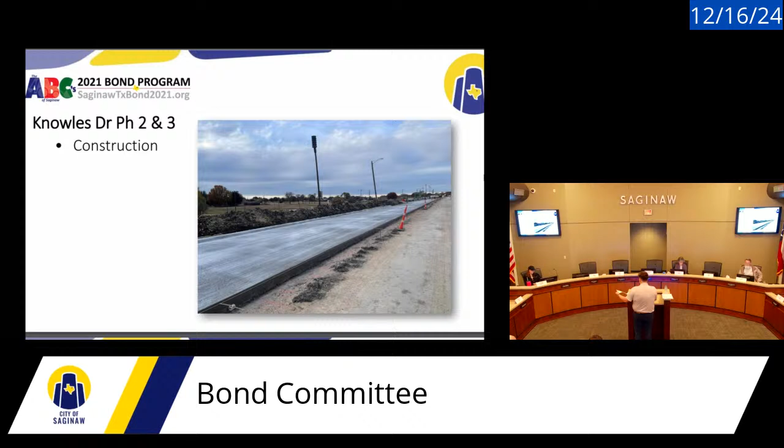The project under construction right now that was also funded from the bond program is Knowles Drive Phase 2 and 3. This goes from Knowles Phase 1, the north end of the park, all the way down to Longhorn. This will include a roundabout at McLeroy and also a traffic signal at Longhorn. We're hoping construction on the south side will wrap up in a couple months. The final piece, the roundabout and culvert crossing on McLeroy, will be the last missing piece, and should be finished before school starts next year in August.

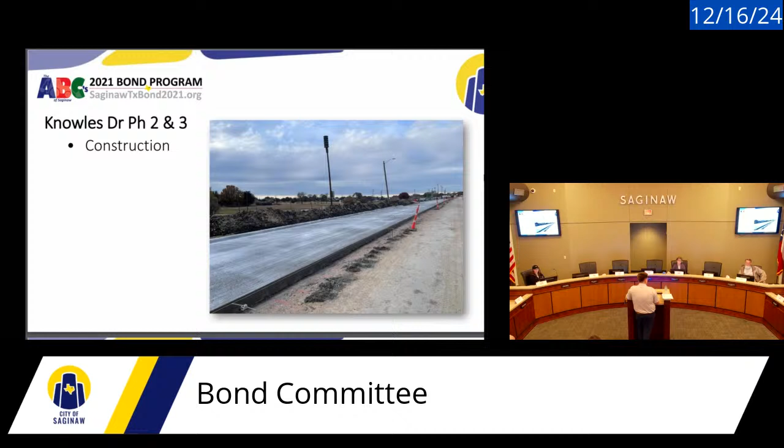I forgot my notes, one second.

This summer in June, we actually met with the council to reprioritize the remaining bond funds. One of the projects that wasn't originally on the list but got added was North Old Decatur. The limits of this project are from Bailey Boswell up to the city limits, and we'll reconstruct it from the 2-lane road with roadside ditches it is now to a 3-lane section with internal storm drain and sidewalks on both sides. We're working on final design right now, and our goal is to start construction either late summer or fall of next year. That one is fully funded, design and construction.

Is your mic on? I believe so. I can talk louder if you like. Yes, ma'am.

The next project in the 2021 bond program is McLeroy Phase 3. This project goes from Knowles Drive on the west to Saginaw Boulevard on the east. We kicked off final design this summer and will be submitting 60% design this month. The goal is to start construction in early 2026, with both design and construction funded for McLeroy Phase 3.

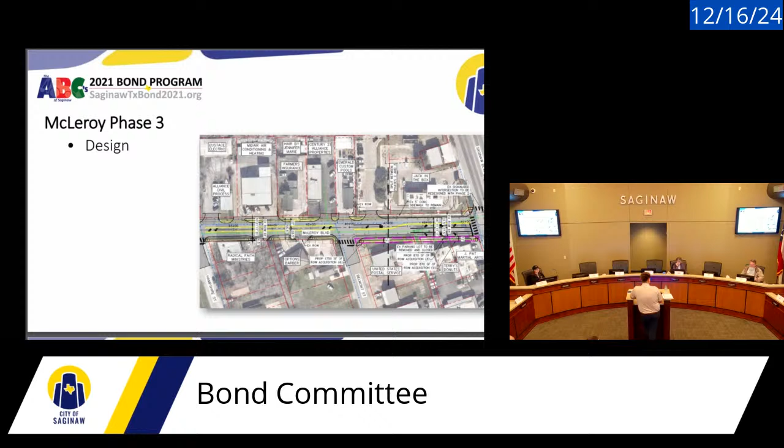One of the projects added to the list from our council meeting in June is McLeroy Phase 2A. You'll see this on the overall map exhibit labeled number 1. The last bond program funded the design but not the construction. The limits of this project run from Saginaw Boulevard over to Spring Hollow, which includes all the railroad crossings—a big headache for people driving through there—and the traffic signal approaches at the boulevard on the west side.

So just to emphasize, the design for this project was funded, and we're under contract for that. However, the construction does not have funding at this point. Any questions on that?

Does it include the railroad track construction, not just up to it? Yes, sir, the panels would be replaced, all the gates and mast arms, all of that. I thought the railroad paid for all that. We pay for it, but then they maintain it. So all of that is included in the project.

So what do they plan on doing here? What would the improvements be, specifically as you head westbound at the approach? Right now I believe it's two lanes heading westbound and two lanes heading eastbound. I'm talking more on the east side of the tracks. We're still finalizing some of those elements since this design is headed toward 60% but not there yet.

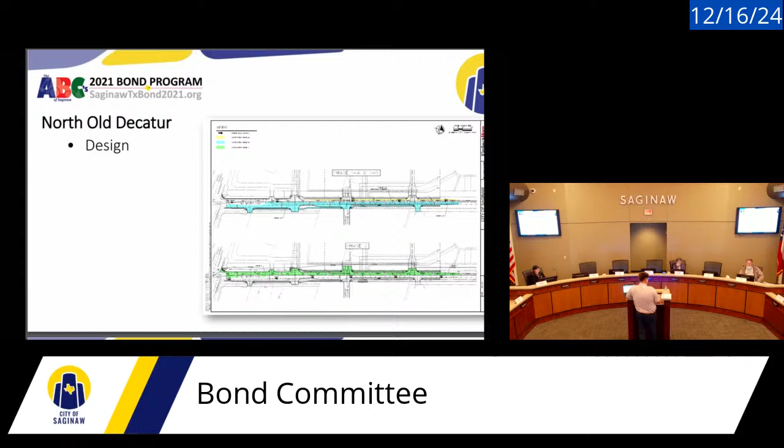Okay, I believe I got through all of these — oh no, there's one more. This one was not funded from the 2021 bond program. The tentative plan was that this was going to be included in the development under design for McLeroy Phase 1. This is the very east portion, and on your map this would fill the gap between segment 2 and 156 — basically Lavon to Blue Mound, or 156. So this would fill that final gap of McLeroy Phase 1, and it's actually a realignment. I have it listed as a project in the works because it's currently under design with the developer. This one is dependent upon the developer, unlike the previous projects which have bond funding or regular city budgets applied to them.

Is there no update on a date yet? I don't have an update. Do you? They don't have finalized civils yet, so they're planning. Part of the hiccup is, we're calling this McLeroy Road, but it's essentially Western Center being extended. The signalized intersection has to go through TxDOT, which is quite a lengthy process for the developer, since they're required to install this fully as part of their process.

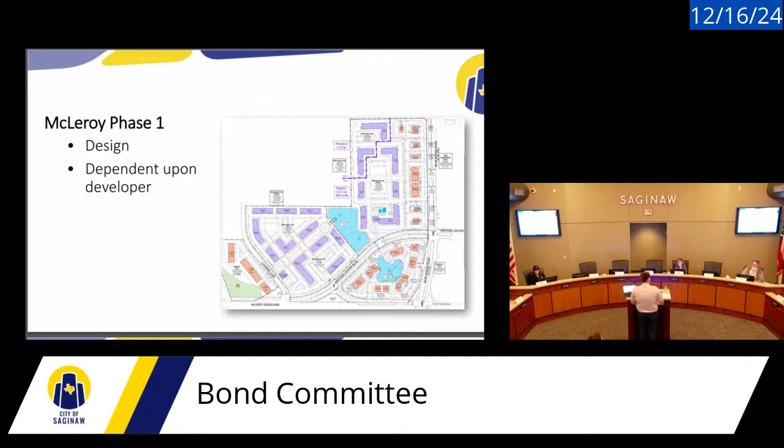Okay, so the next few projects are potential bond projects. We're going to talk through the CIP, Capital Improvement Plan, first, and then I'll talk about a couple of maintenance projects. These are in order, so if you're following on your map or slideshow, we'll go 1 through 7 on the map. The first one is McLeroy Phase 2A, which we just talked about, going from Main Street, or the Boulevard, or Business 287, however you want to call it, to Spring Hollow.

Something else I'll have on all of these slides is a PCI rating, which is a Pavement Condition Index, a scale of the condition of the road from 0 to 100. We worked with staff and did an inventory of all the roads — we hired out to a company that specializes in that, and they collected the condition of all the roadways in Saginaw approximately 2 or 3 years ago. These ratings are from that date, and every 5 years or so Saginaw will get new data, which we use to help craft the SUMP program, the street utility maintenance program, and the street rehab program. Is PCI, what's the scale? 0 to 100.

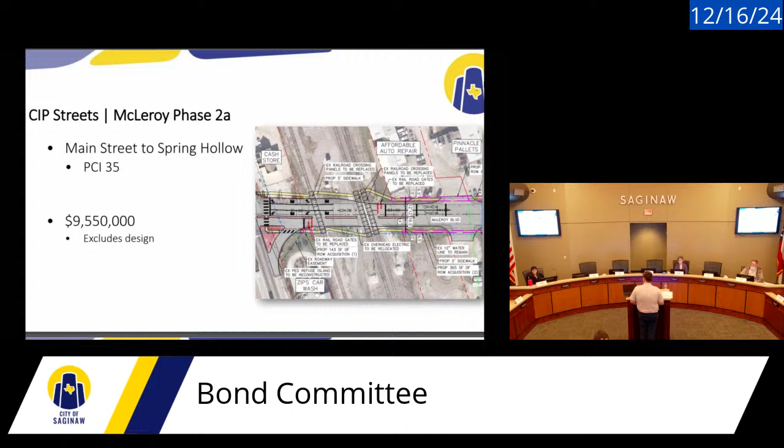This one is what we call McLeroy Phase 2B. As you can tell, we split what was previously known as McLeroy Phase 2 into 2A and 2B. That was in order to get a better sized chunk, so we could focus on that railroad section from the boulevard to Spring Hollow. But this would be from Spring Hollow to Lavon. The PCI rating of it is 64.

In the same vein that Gabe was just talking about, there was a pulverize and overlay that occurred with the county, I believe 2 or 3 years ago. And that's why this pavement condition is in slightly better shape than the rest of McLeroy, although I did find something severe out there when I went to take pictures, actually west of Lavon towards Blue Mound. That's west of Lavon, looking in the other direction? Okay, I may have got my pictures mixed up.

So from everything shown, we're not planning on doing any maintenance on that section of the street, which needs it more so than Spring Hollow to Lavon. Yeah, it's in worse condition for sure.

It's a fair point that right now, I don't know if it's the bird in the hand, but the opportunity that lies in front of the city is to take the developer up on leading the charge on that roadway east of Lavon. However, it's not a sure thing, and the time frame on that is not a guarantee at all, because 2 years ago, when they redid from Spring Hollow to Lavon, they did not do from Lavon to Blue Mound. Correct, because it was anticipated to be - it's still waiting, and it's worse. Yes, certainly.

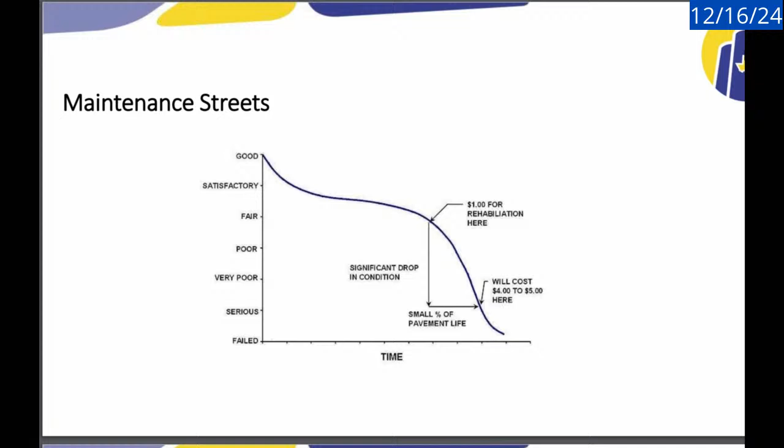So that's a really long-winded explanation to say Opal Street from Longhorn to McLeroy is one of our top priorities. We have this scheduled currently in the SUMP program, but we're breaking it out into 2 or 3 phases. Its PCI rating is 30.

I want to clarify, this cost is actually just for the pavement. When I was pulling these numbers, I realized today, and I talked to Jared about it, that I had a mistake and that this number was just for the pavement. So what I'd like to provide later this week is a number that includes all of the utilities and all of the pavement, because we don't want to disassociate those projects. I had honestly thought that we had enough money in what's called the enterprise fund, which funds our utility projects, to pay for the utilities. But we spoke with Kim and she told me I was wrong. So I anticipate the number I'll give you will be between 2.5 to 3 million for all of the utilities, and it'll include a full reconstruction of the road and then spot repairs for sidewalks and ramps that are necessary, not a full reconstruction. So that's 2 to 3 million total, not in addition to the 170.

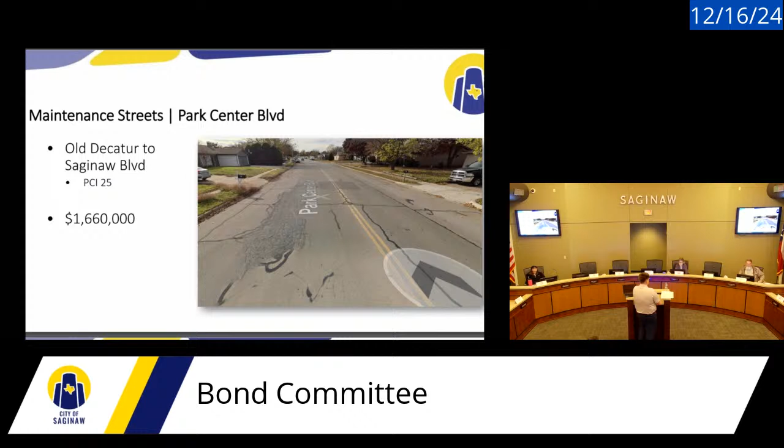Any other questions before we jump to sidewalks?

So we only have one sidewalk project under design currently. We just finished up - Thompson was the last one. We also did another portion of Southern, Bluebonnet and Opal recently.

A lot of those were funded by two sources. The city had issued $1 million in a CO bond designated towards sidewalks. So we use that as well as leveraging funds we get from Tarrant County for the CDBG, Community Development Block Grant Program, which targets lower income areas. We get that funding every other year, and that's typically how we fund sidewalks.

But we'll talk today about some larger sidewalk gaps that aren't eligible for that grant funding that may be considered for the bond. So this Southern Sidewalks design -

Is it not on here? Oh yeah, because it's an ongoing project. It's from Bluebonnet to the shopping center at the Boulevard, which connects to the previous Southern project we did, and that is in design right now. We should be able to advertise that project early next year, probably go to construction early summer.

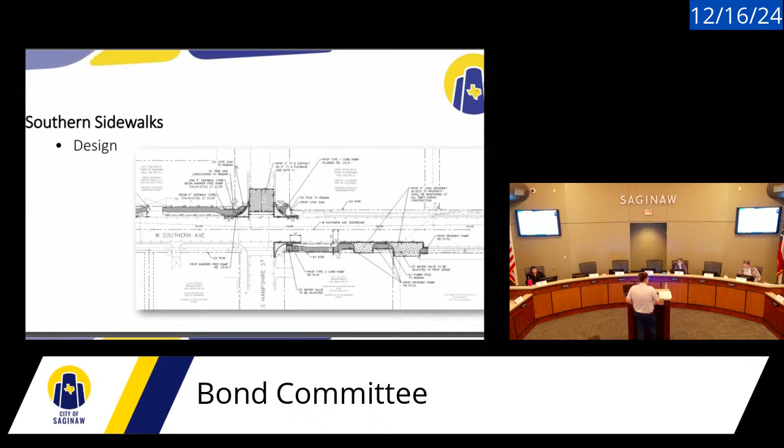And that is actually fully funded by the Community Development Block Program. Okay, so -

Three gaps that I really wanted to hit on today, which have been brought up either through citizens to council, council to staff, or staff, is Old Decatur. So Old Decatur, there's quite a large gap from Sherwood to Longhorn. On your exhibit, it's the green line 10 on the very left.

And so some of those parcels of land aren't fully developed, so when they were to develop, we would require that developer build those sidewalks. But kind of Clayton, to your point about McRoy, there's no telling when that would actually happen.

And then I know Councilman Paul was saying that this is kind of an area that he thinks is in dire need of these sidewalk improvements. So this was something he's been asking about. So total cost for that would be $1.2 million.

The other gap that has surfaced as a priority is Basswood. And so that would be on the north side, I think you said, Rick - north or east, depending on where you're at - from Blue Mound to Whistle Stop, which is just near the fire station.

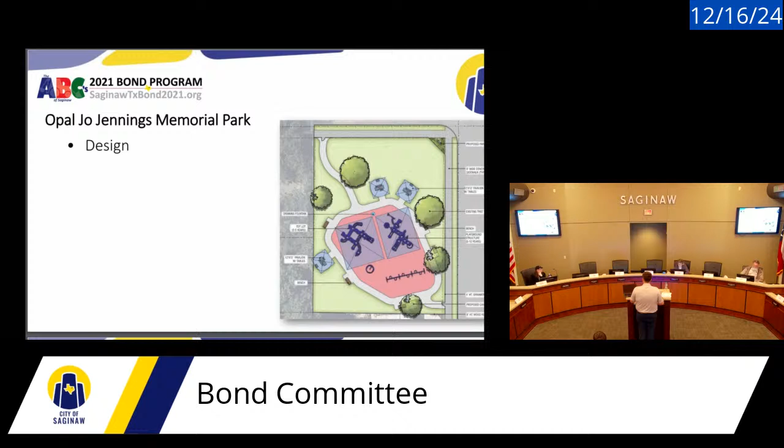Some of the ongoing park projects we have right now are Opal Jo Jennings and Brian Schwengler. Both of those were funded with the 2021 bond program. We are very close to final design on those right now. Our goal is to advertise them in January, and then we would look to start construction in the summer. Laura's worked with a few of y'all to get those selected and in motion, so really excited for those.

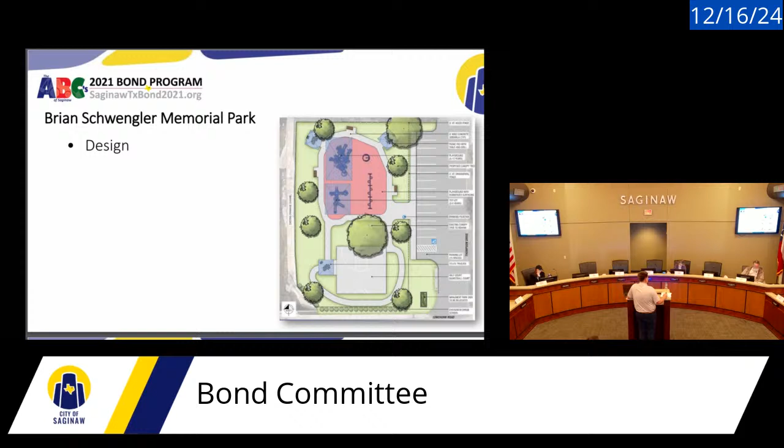And the design for these 2 parks came out of the 2021 bond? Yes, sir. What was the cost for that? I don't have that. Do you happen to have that? Or we could give it to you this week. Okay, that's fine, go ahead.

For Opal Jo Jennings and Brian Schwengler, the allocated amount was 2.335 million, and the expended so far, we're in the very beginning stages, is $558,017.39. Is the design complete? Design is not complete, but we're fully under contract. So a total of 2.3 million for design for 2 parks?

For both. No, for all of it. Is that, Jo and Brian, that price for design and construction? Yes, both. Ah, okay, okay. Yeah, but not just design. That would be astronomical. Glad we clarified that.

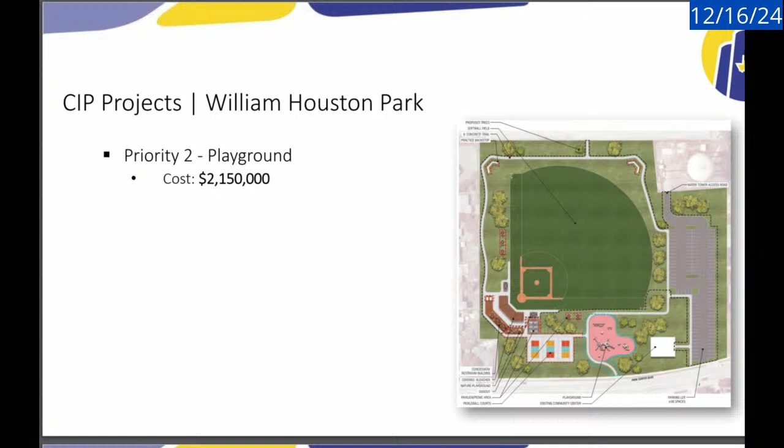Okay, so the third priority is a phase of Willow Creek Park. This phase that was priority 3 is the dog park.

One of the emphasis of reconstructing this dog park is to make it larger, add a lot more amenities, not only for the animals but also for the pet owners, such as benches, shade, water, pavilions. The other idea of expanding and reconstructing it is that it would add a third paddock or area where dogs could play. This would allow staff to rotate the fields, letting the grass and turf recover and keep those fields in better condition throughout the year. So this would really enhance and improve that dog park, and then all new fencing.

Laura, am I missing anything? Is that a parking lot? No, that's not right, no parking lot as part of this phase, but it would have sidewalk connections to the existing parking lot and sidewalk, and then pavilions as well, a shade pavilion. So cost for that is $1.15 million.

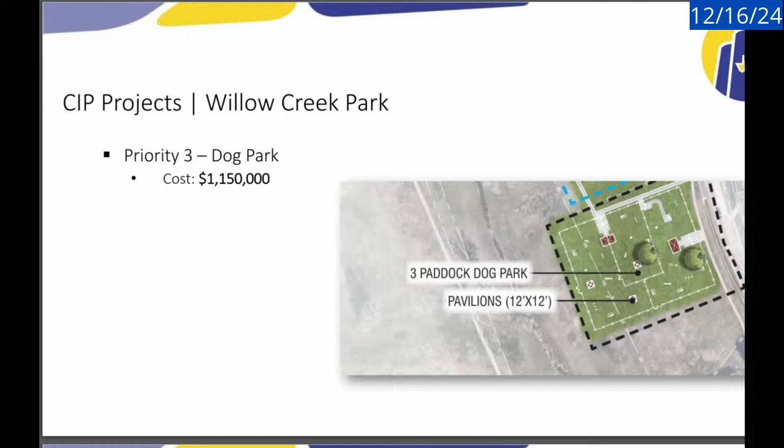We're going to come back to Willow Creek Park after this, but the fourth priority is Highland Station Park. This would be the north or maybe northeast area of Highland Station Park, also in the northeast area of town. The improvements we're looking to include in this phase would be adding 2 basketball courts and 4 pickleball courts.

This would keep the existing skate park, the existing tennis court, and the existing basketball court, which is used for a variety of things. It would also have a reconstructed dog park. There's not enough room, as I understand it, to do the 3-paddock idea of rotating fields, but this would include pavilions and some of those other amenities for dogs and dog owners.

So is the idea on Highland Station Park related to the little cul-de-sac by the existing skate park? That's an existing cul-de-sac, mostly used for access to get into the park and emergency access. So unfortunately, Highland Station Park doesn't have the ability that Willow Creek does, where you can drive the entire distance.

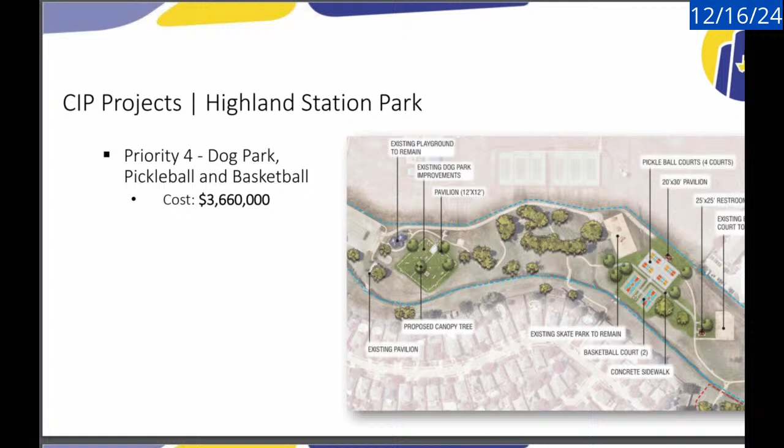I'll say this, because we're about to get to Willow Creek Park - you saw pickleball courts at William Houston, you're seeing pickleball courts here, and you're about to see pickleball courts at Willow Creek. Those are things that are fluctuating. We had the conversation about it in our last meeting - if we're doing one thing in one area, like a lot of people want pickleball courts, it's just kind of figuring out where it's going to fit best within the parks we have available.

I think we discussed that if we have 3 courts in the 3 big parks, I wouldn't want to take out Highland Station because it's the only one on this side, the east side, versus the 2 that are pretty much within a mile of each other. So it just depends on location. Just because William Houston Park Phase 2 has pickleball courts and was a higher priority doesn't mean we need to do those pickleball courts before we do redevelopment on this one, Highland Station Park.

Don't get me wrong, as far as Highland Station - where you've got people going in to play basketball and pickleball, are they too tired to walk that extra little distance? If you're going in to play basketball, you're going to be exerting some energy, you're going to be moving around. And I'll point out they are closer to the parking lot than the existing basketball court and the existing tennis court.

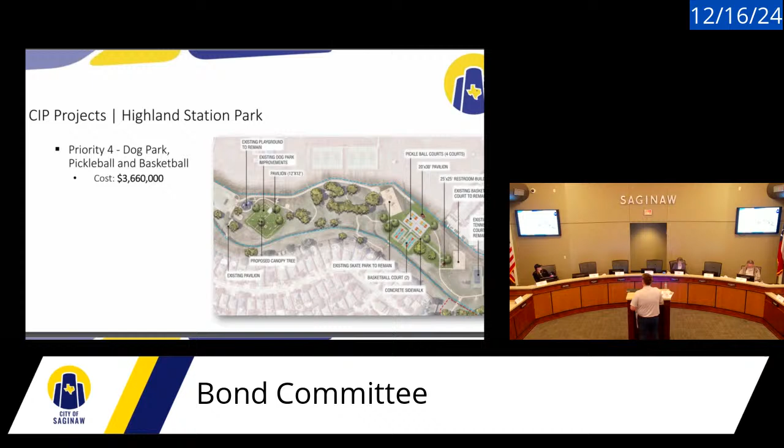Let me show. So right here, that's the emergency access road, correct? This trail, that's the last phase, is right here. Got it. Okay, so this is not the picture.

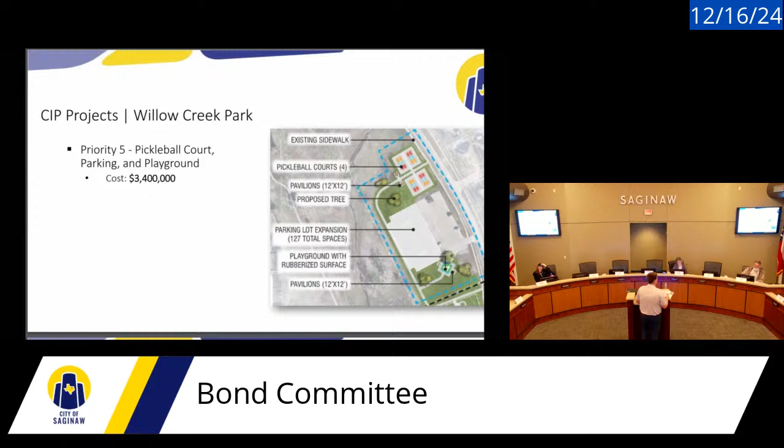Oh, I'm on the wrong slide. Sorry, wrong picture. Oh, you're on the wrong one. I'm on the wrong one too, I think. Are you messing with me, Pedro? I'm trying to go to the last one. It's all Pedro's fault.

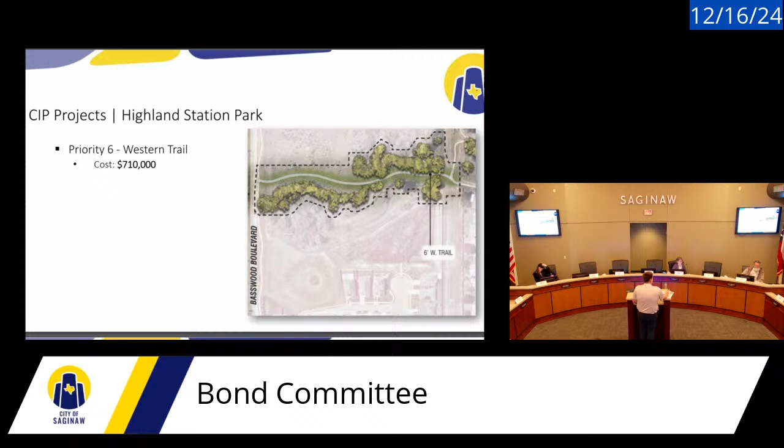There we go. Any more questions? Yes, I don't know if this is for Parks Board, Kimley Horn, or Gabe, but with our parks, if the voters approve it, we're going to have some pretty darn amazing places to go play.

Are there going to be, you've seen them around college campuses, the emergency phones, if somebody needs help, you know what I'm talking about? Yeah, the little stations where you press a button and it automatically alerts 911 and sends your location.

Willow Creek Park has some pretty long stretches, Highland Station Park has pretty long stretches too. I don't know what Belt Mill's going to look like, but are those in the plans? Are there going to be, almost hate to say it, video cameras or some kind of cameras? This equipment we're putting at the parks also costs money, and we need to invest in playground equipment. But what's the security plan for our parks? Because this is some good stuff.

Right now, the cost estimates don't include emergency access phones or security cameras. That's absolutely something we can look at, including talking with Public Works and PD to get their input. I didn't include Lee on that question, by the way.